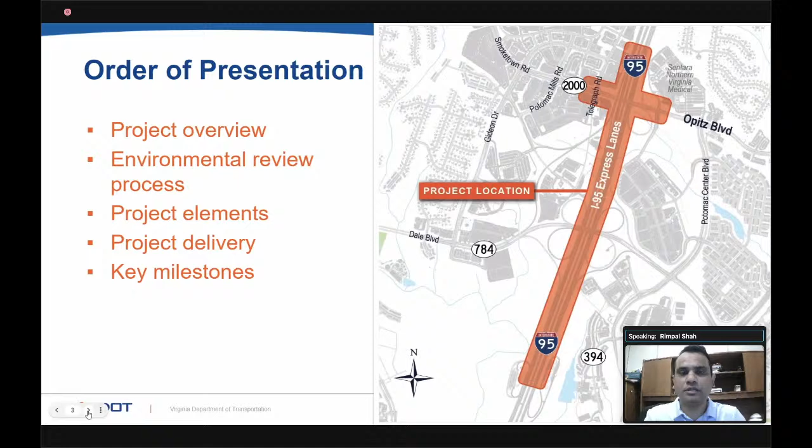Thank you, Michelle, and good evening, everybody, for joining today's design public hearing meeting. I will go through the presentation for mainly the project scope and the technical aspect and also the environmental document on the project. The presentation order will be: project overview, environmental review process, project elements, project delivery, and key milestones. Next slide.

Now, in terms of the project overview, the purpose and need for the project: this project improvement will provide an additional travel choice for the 95 corridor user as well as for the 95 express lanes corridor. By providing this reversible lane, it will provide an additional access point for Opitz Boulevard, both for the Sentara Northern Virginia Medical Center as well as for the Potomac commercial area.

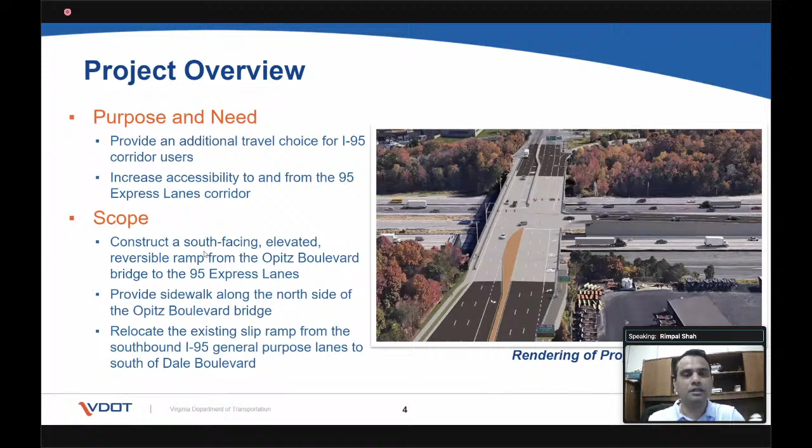This slide represents the current existing operation for the express lanes. The purpose of showing this slide is to show that by implementing the project, we are not going to replace or modify any existing express lane operations. Carpool HOV3, buses, and motorcycles will still travel toll-free the way they are doing right now. All the rules of the road and tolls will be in effect at all times, and all the regular lanes will remain free of charge. As we know, E-ZPass is also required for all drivers, with HOV3 free via the E-ZPass Flex.

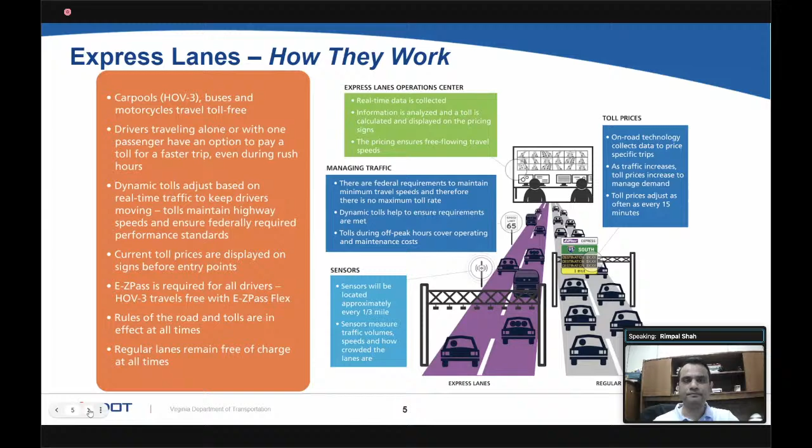By implementing the project, the 95 express lane access will change, along with the schedule in terms of access. This project will construct a new ramp connection between the 95 express lanes and Opitz Boulevard. As part of this new ramp connection, the existing slip ramp will be relocated south of Dale Boulevard to maintain the current access point to the express lane from the I-95 general purpose lane. The table below shows the express lane's approximate schedule, which changes seasonally and during holidays. For accurate information, refer to the express lane website.

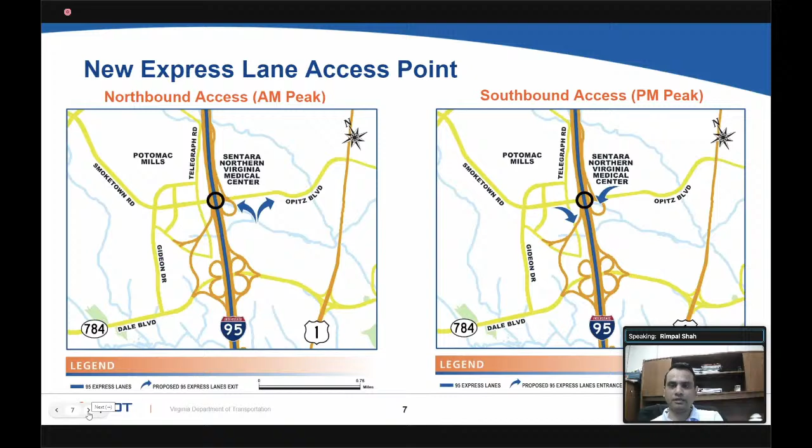This slide represents how this project implementation will provide new access points from Opitz Boulevard as well as from the express ramp. During the northbound movement in the morning, this new reversible ramp will provide entry to both the Northern Virginia Medical Center and Potomac Mills. Looking at the graphic on the right side, during evening peak hours it will provide an exit or entry point to the express ramp from Potomac Mills and the Sentara Northern Virginia Medical Center, which currently does not exist.

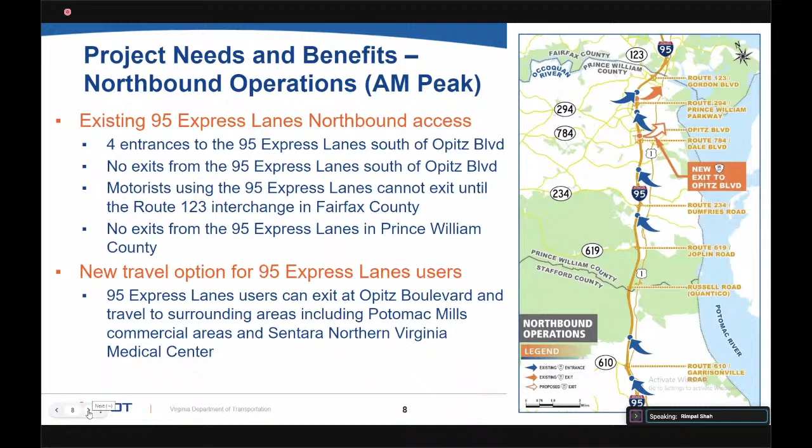This slide represents the overall current access points for the express lane, mainly representing northbound operations. Looking at the graphic, all the blue arrows represent entry points to the express lane from the general purpose lane or local arterial street. But there is currently no exit point from the express lane just south of Opitz Boulevard, until you go back to Route 123 where an exit point exists. By implementing this project, we will provide the motorist another choice to exit at Opitz Boulevard, where the main commercial area exists for Potomac Mills, as well as for the Sentara Northern Virginia Medical Center.

This slide represents similar operations for southbound during the evening peak hours. All the orange arrows represent the exit point from the express lane to either the general purpose lane or the arterial street. The blue arrow represents the new reconstruction of this reversible ramp, which will provide entry to the express lane from the Opitz Boulevard area and all other surrounding local streets. By implementing the project, travelers will have an additional choice to enter the express lane within Prince William County.

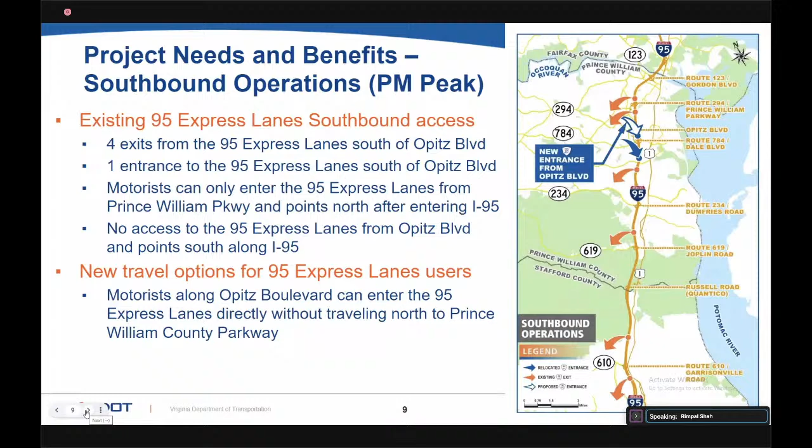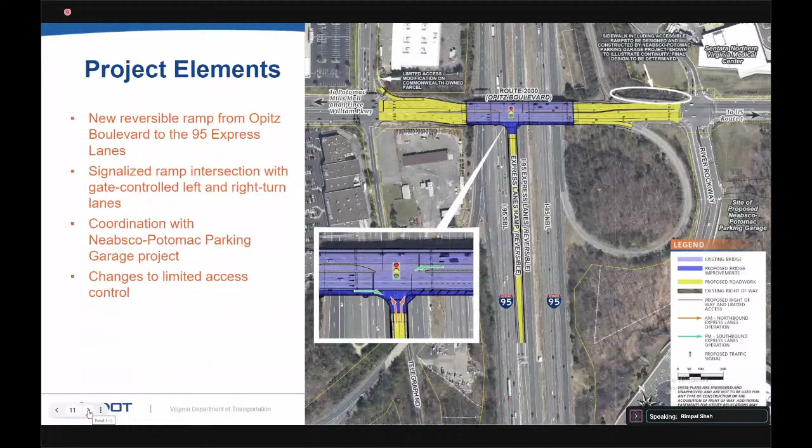There will be a gate installed to control the left and right movement to enter and exit the reversible ramp. The fourth element is the continuous sidewalk that will be constructed on the north side of the bridge, providing continuous access for pedestrians from Telegraph Road up to the River Rock Way.

As part of the project, we have to widen the bridge on the south side where the reversible ramp connects with the Opitz Boulevard bridge. This will provide an additional dedicated right turn lane for the northbound loop ramp. There will also be toll rate signage installed on both sides of the interchange so travelers know the rates before entering the express lanes.

As mentioned, there will be bridge widening as part of the project improvement, and all bridge elements impacted by this project will be brought back to current VDOT standards. There will also be a concrete barrier installed to separate pedestrian movement from general traffic on the Opitz Boulevard bridge, and that barrier will receive architectural treatment on both sides.

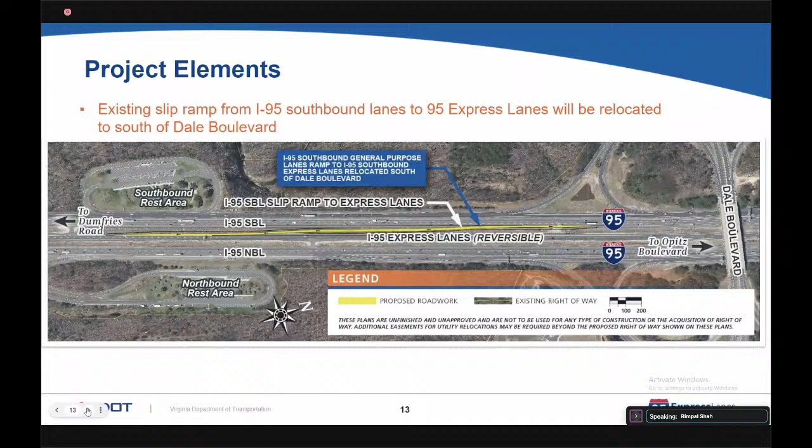In terms of project delivery, we have currently executed a development framework agreement with Transurban to develop the Opitz Boulevard access ramp project. As part of this agreement, the concessionaire is going to submit a proposal to meet the technical and financial criteria for VDOT's review and approval.

In terms of responsibility between VDOT and the concessionaire, VDOT is still going to review and approve the interchange access report and all environmental documents, which in this case is the categorical exclusion, before submitting it to FHWA for final review and approval. All other required CTB or FHWA approvals will also be led by VDOT. VDOT remains responsible for review and approval of the final design and construction, and for overall oversight and coordination with federal, state, or other local government entities involved in the project, in this case mainly Prince William County.

In terms of the concessionaire's responsibility, they are responsible for developing the preliminary engineering plans, interchange access report, and categorical exclusion document for the environment, for a project delivery that will use the design-bid-build method. They are responsible for procurement of the contractor, overall project funding, and once constructed, for operation and maintenance.

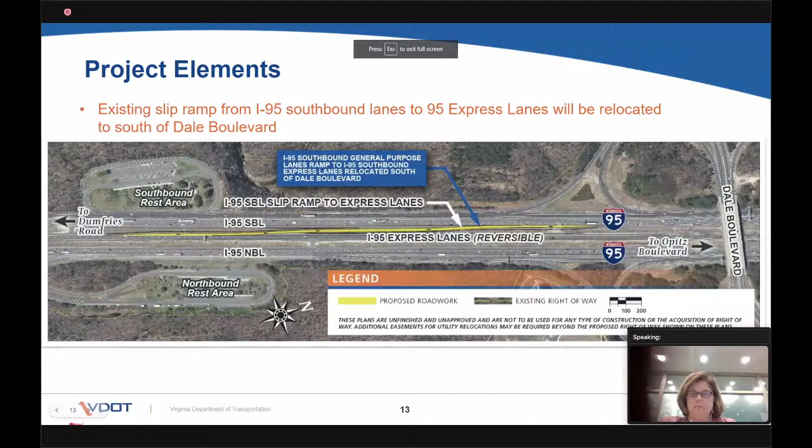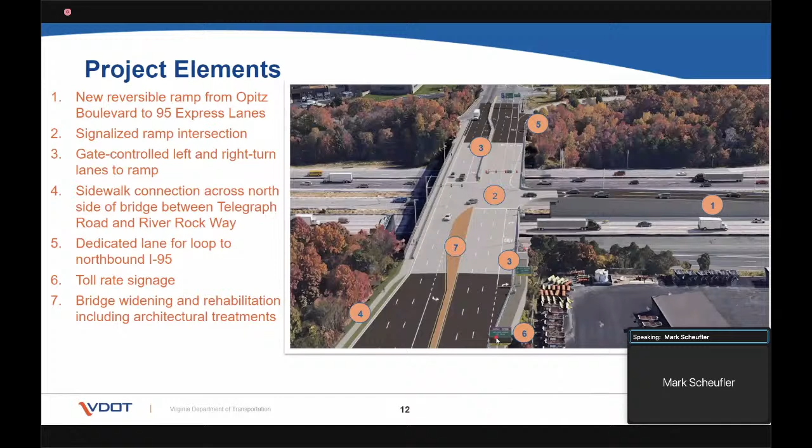Yes, sorry, I got to work. I was just asking, for the future case, whether you could allow for bidirectional service. So we build the ramp with the potential for bidirectional express lanes in the future. I think that's sorely needed on this corridor.

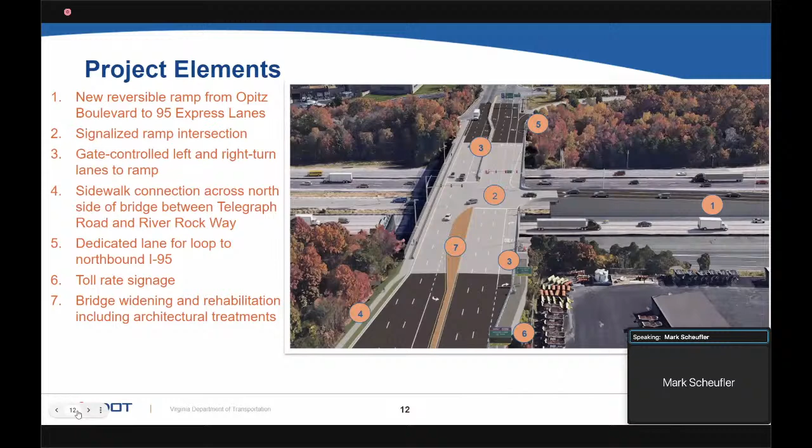I just don't want you guys to spend all this money and have the bridge not be big enough to allow for bidirectional service. I think Monument Drive is a case where it used to be one way in, one way out, similar to how this ramp is going to be built in the near term. I just wanted to make sure it could allow for bidirectional, because I know they switched the Monument Drive one to allow for bidirectional service currently, and that's how it's going to be for the I-95 express lanes. I just want to make sure they're building a bridge big enough to allow that potential in the future, because I think that's sorely needed in the corridor within the next 10 to 20 years.

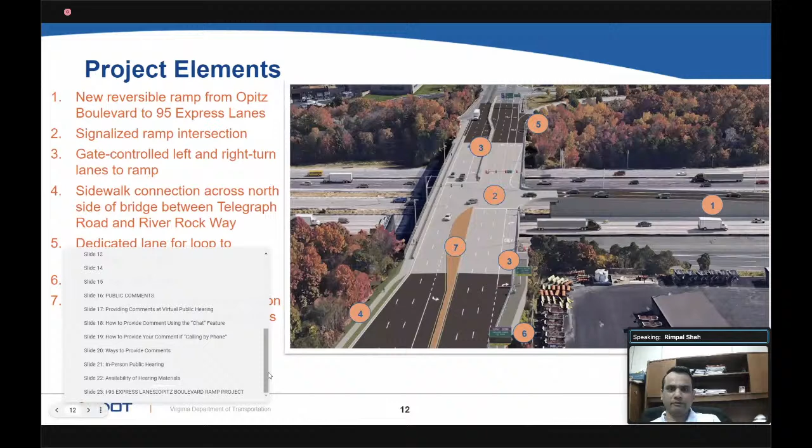So the I-95 express lanes already have a reversible ramp, and this ramp will also act as reversible. During the morning hours, it will allow movement for the northbound, and during the evening, it will allow entry for the southbound express lanes.

Yeah, I understand how it's going to work when it's built. I'm just trying to say—are you talking about building the ramp to the north side of the bridge also? Is that what you're referring to? I'm referring to, I want to say, you could do both north and south at the same time if express lanes were converted in the future to be bidirectional in the I-95 corridor.

You're spending $70 million on this project. I just don't want you to have to spend another $60 million to redo the bridge if you want to have bidirectional service in 25 years.

This is Brent McKenzie, I'm with Transurban, and I understand the question you're asking, but if VDOT chose to do bidirectional express lanes at some point in the future, those additional lanes would have to be built in a different space, so this ramp would not allow for that bidirectional use. The geometry just wouldn't really allow for it. I understand the concept of what you're going for, but that's not going to be the case with this one.